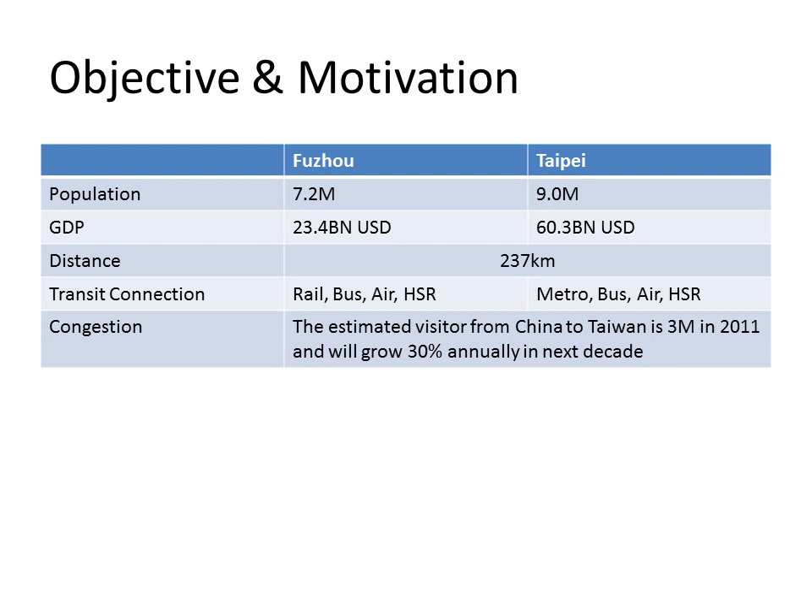For congestion, we are estimating that visitors from China to Taiwan will increase by 30% annually, starting from 2011 with a number of 3 million passengers, and it is going up 30% in the next decade.

First of all, we need to select our route. From the two locations, Fuzhou to Taipei, a total distance of 237 kilometers, we are going to have 3 stations for the total route.

The first station will be Fuzhou at the city side, the second one will be at the island called Pingtan, and the final one will be reaching Taoyuan city, in the Taipei center.

Looking in more depth, from the Fuzhou area to Pingtan Island is a distance of about 75 kilometers. We chose this route because we noticed there is a new development area happening in Pingtan Island.

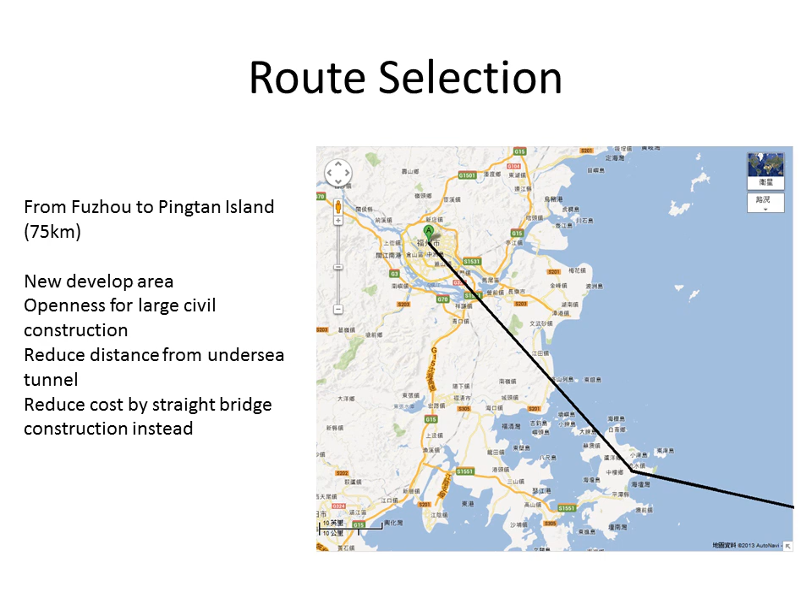That is an area of openness which can consider large civil construction being built. It also reduces the distance needed for an undersea tunnel, which reduces cost because using bridges is cheaper than using an undersea tunnel.

Once we get past Pingtan Island, we need to head towards Taoyuan city in Taipei, which consists of 164 kilometers.

This is a closer route we chose because we are starting here and can get from the coastline to Taoyuan city in Taipei directly.

Taoyuan city is 30 minutes away from the Taipei city center, which has mature public transportation. It is being developed for a further interchange railway if necessary, and it also avoids environmental impact issues by using an undersea tunnel.

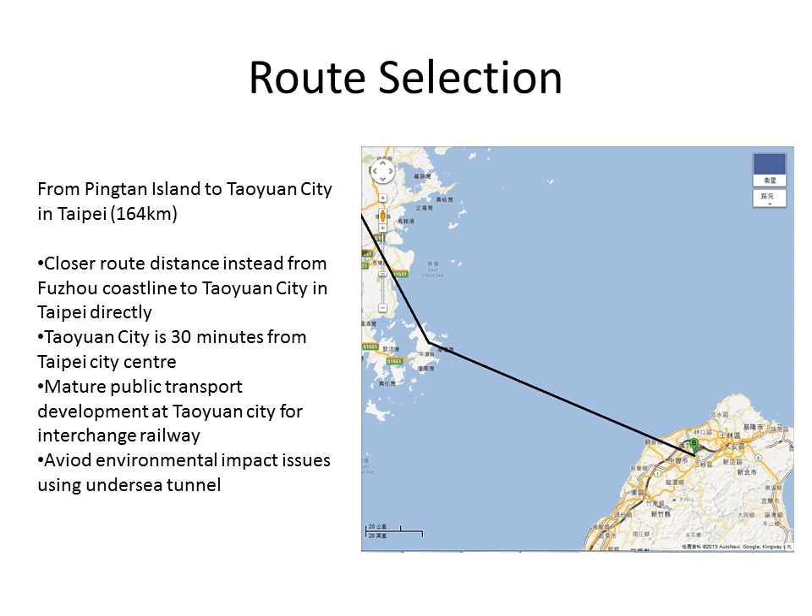For the next stage, we need to select the stations. In the Fuzhou area, we are looking at the Fuzhou South Railway Station, which is in the city center.

Finally, when we get to Taoyuan city, since there is already a high-speed rail station built, we reckon that with further improvement in construction, we can link up to the station as the final destination.

This is a table summing up our station selection. As we can see, the estimated traffic demand for existing transportation from Fuzhou to Taipei will be similar, using rail, air, buses, and high-speed rail.

For Pingtan Island, on the other hand, they are mainly using buses as the most common transportation. Next, we look at the population served.

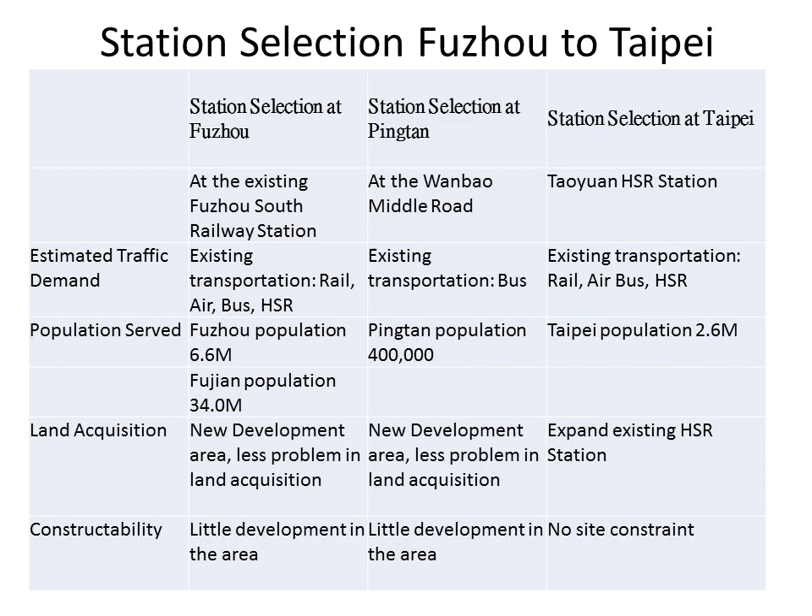Okay, for the second part we'll be looking at the environmental impact. Looking at Fuzhou, it is not situated in an environmentally sensitive area, and Pingtan Island is also not situated in an environmentally sensitive area. Whereas on the other hand, the Taipei area also has no major impact.

And then looking more deeply in terms of new and improved developments: for Fuzhou, it will be a new development area, allowing more new developments because it's adding construction. In Pingtan Island, there will also be new development as they should do. And for Taipei, there is not much existing high-speed rail station, and that's why we're going to improve it.

For accessibility, in Fuzhou the location is right next to the existing railway station and is served by the highway as well, so it's really easy to get to. In Pingtan Island, the most common transportation is the bus network, and this is where the station will be built next to.

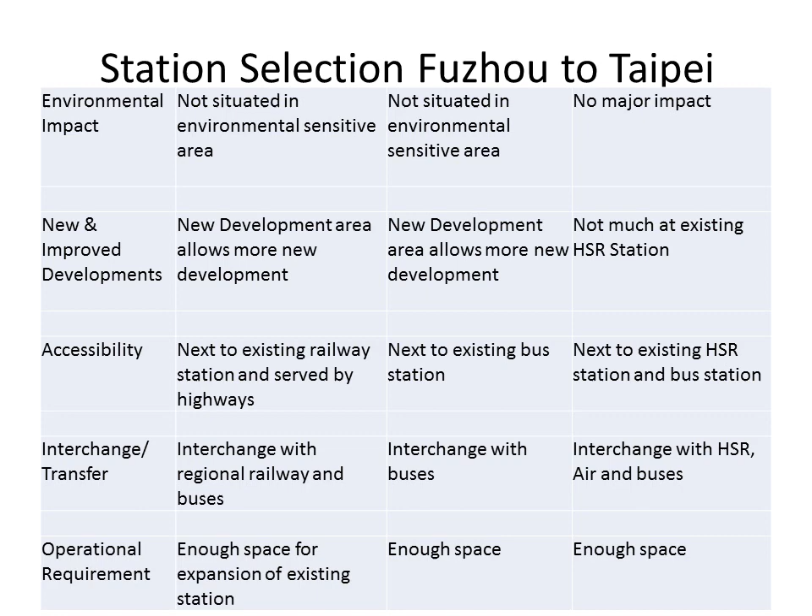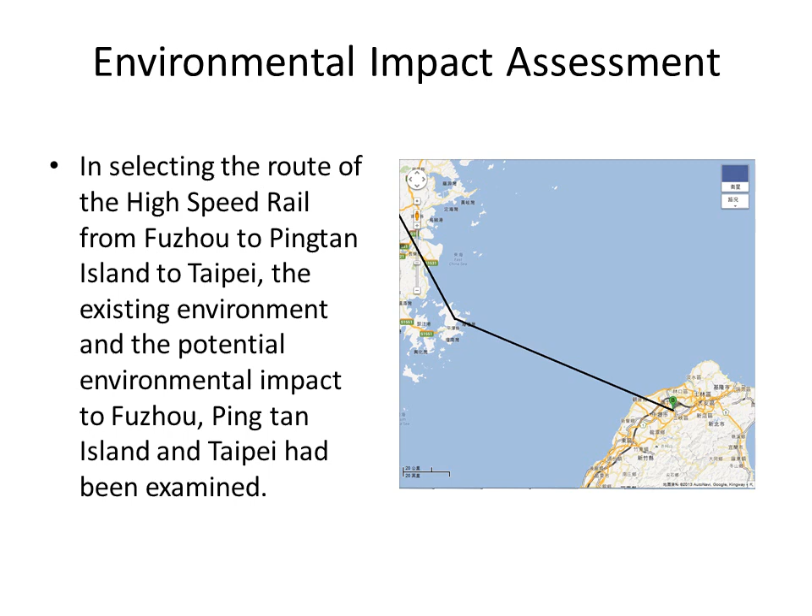Regarding the environmental impact assessment, in selecting the route of the high-speed rail from Fuzhou to Pingtan Island and to Taipei, the existing environment and the potential impact to the environment in Fuzhou, Pingtan Island, and Taipei have been examined.

Fuzhou is a typical river basin area at the mouth of the Min River. Over half of the area of Fuzhou is forest. Therefore, in our selection of the high-speed rail route within Fuzhou, we have avoided most of the forest area and the river to protect the existing ecology.

The natural habitats in the Fuzhou area along our route have also been identified, and they will not be disturbed as far as possible. Therefore, the route of the high-speed rail will have little environmental impact. The location of the Fuzhou high-speed rail station is within the city built-up area, and therefore there will be very little environmental concern.

On Pingtan Island, the geography is mainly natural forest area. Similarly, environmental studies have been carried out on the island, and the same strategy as Fuzhou was applied in the selection of the high-speed rail route.

The route will be mostly on viaduct to avoid large-scale disturbance to the forest area. The station on Pingtan Island will be close to the existing city built-up area. Hence, the environmental impact will also be minimal.

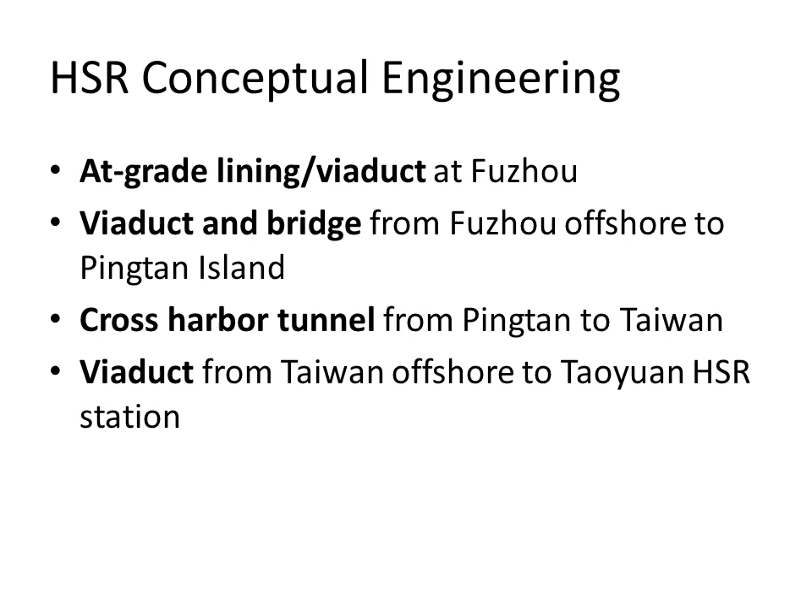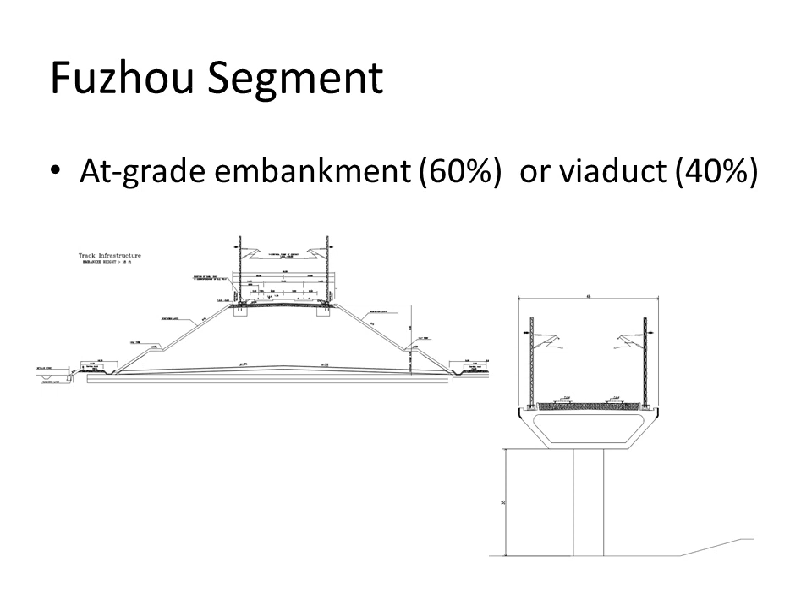And we propose the cable bridge because it is more cost efficient compared to the suspension bridge and other types of bridges, and it will cost less in comparison with a tunnel.

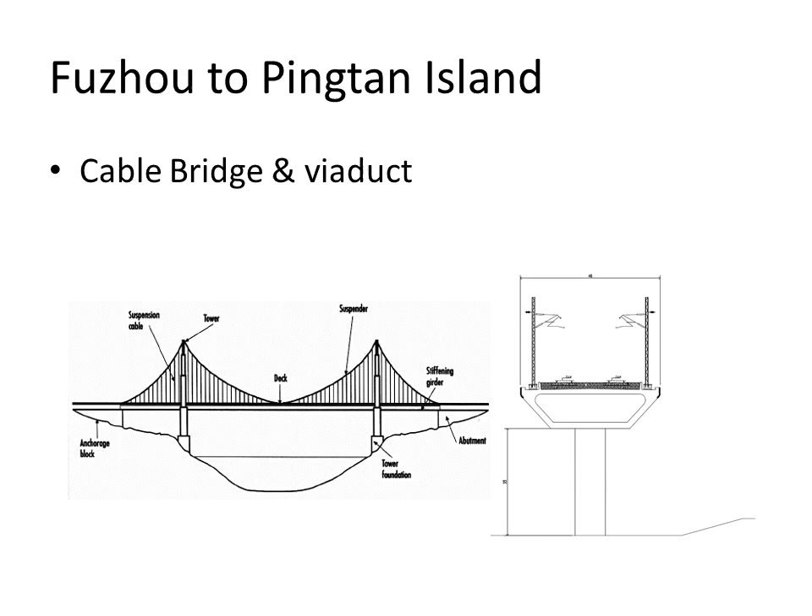There will be 3 tubes and the connection components to the tubes.

A is the main tunnel, in which the high-speed rail track will be built. B is a service tunnel for ventilation purposes, and C is the relief duct in case of a fire or some emergency event, so people can be evacuated to the C area. D is a connection ventilation facility to connect the two tunnels.

This design is very similar to the Channel Tunnel linking UK and France. We propose the additional service tunnel in the middle because for a tunnel more than 100 kilometers long, a service tunnel is a must for ventilation. In addition, when we construct the tunnel, there will be two TBM machines on both sides driving simultaneously to save time and advance the construction program.

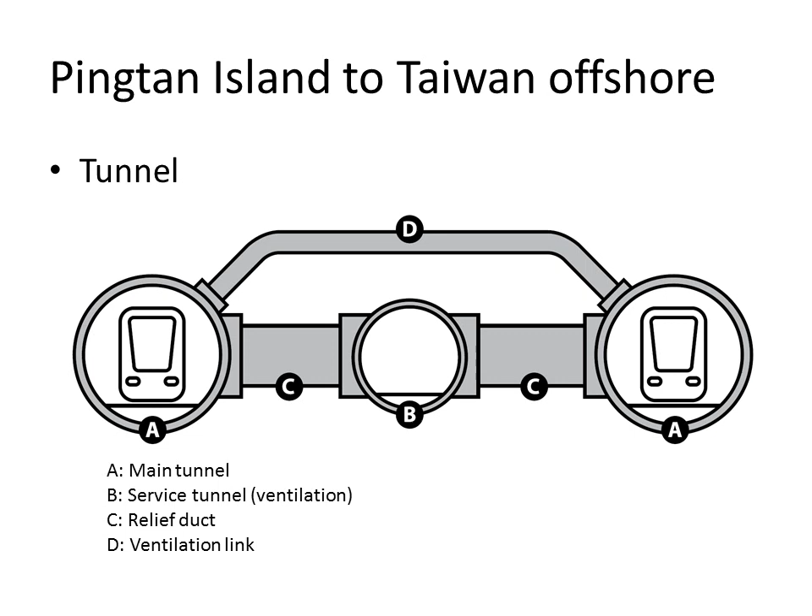From Taiwan offshore to Taoyuan high-speed rail station, we mainly propose a viaduct to protect the environment and save on land acquisition issues. In Taiwan, land acquisition costs are higher, and problems arising from local villages are more severe compared to the Fuzhou area. If we build a viaduct, this can advance the program and save money.

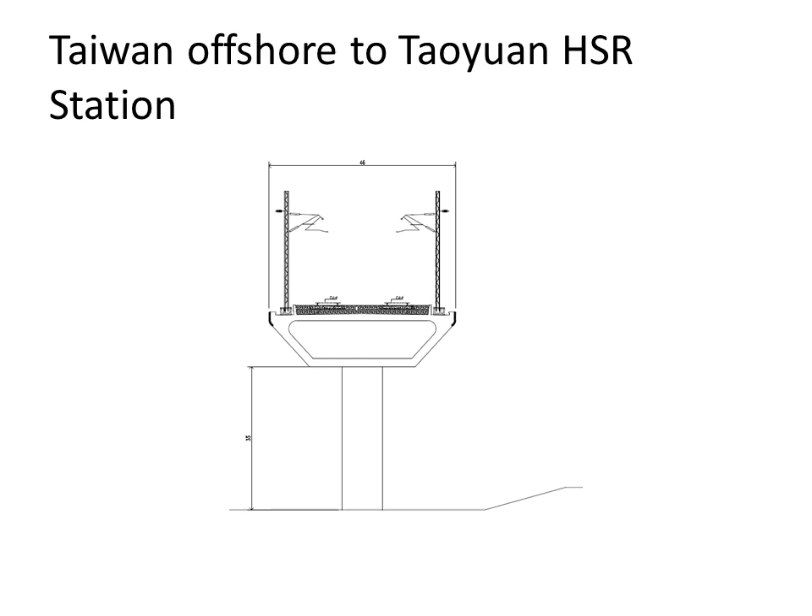The horizontal alignment is okay because there is not a big change in direction when the high-speed railway goes from Pingtan Island to Taiwan. For the vertical alignment, there will be a major change at Pingtan Island, from the bridge to the tunnel. Based on our estimation, there will be enough space on Pingtan Island to construct such a vertical alignment to meet safety requirements.

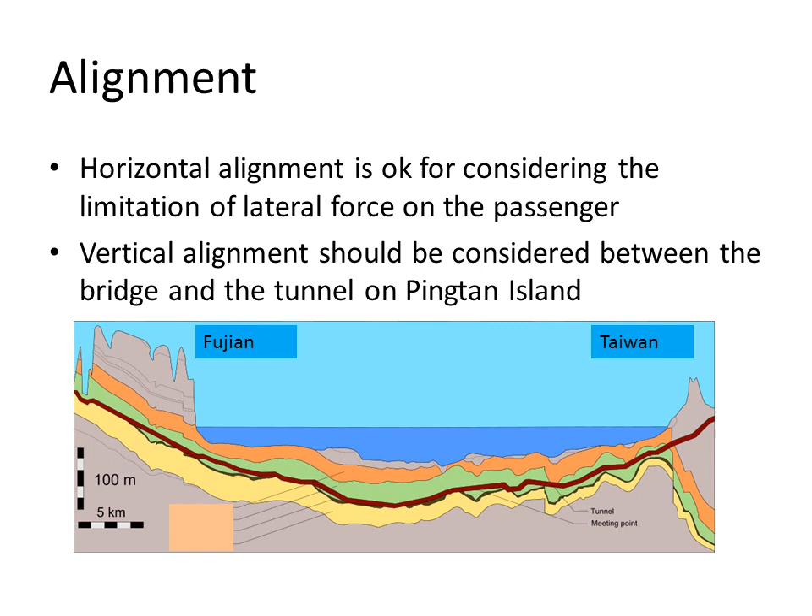I will summarize the key technical engineering challenges in the conceptual design. The first is the distance, the length of tunnel to be constructed. The shortest distance from Pingtan Island to Taiwan is over 100 kilometers, while the longest undersea tunnel ever built in the world is only 38 kilometers, the Channel Tunnel.

So safety is a great concern. For example, in case of a fire, there would be a big problem for evacuation of high-speed railway passengers. Thus we propose an artificial island in the Taiwan Channel to reduce the tunnel length. As well as reducing tunnel length, it can also reduce the duration of the program, because if we build an artificial island, there will be four TBM machines which can be operated simultaneously.

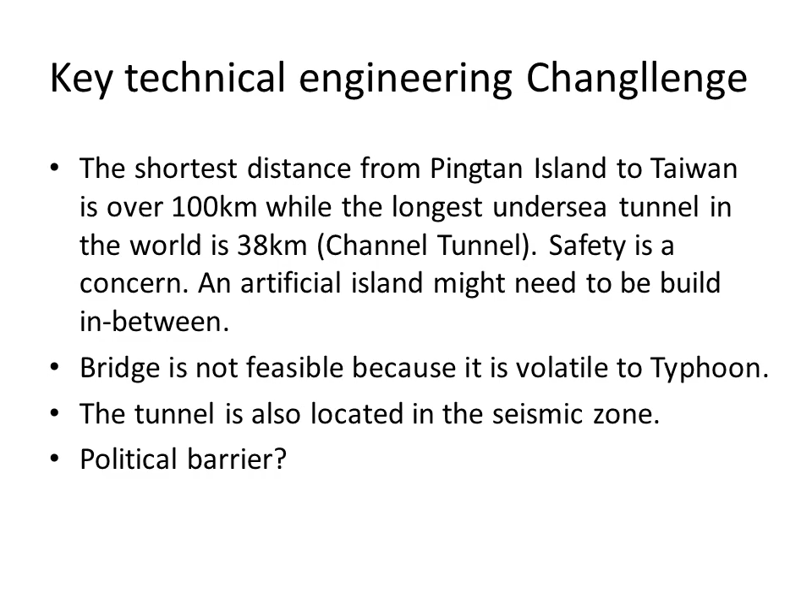If we build a tunnel from Pingtan Island to Taiwan Island, there will be a big concern for the safety of the tunnel under earthquakes, especially for the entrance from Taiwan, which has previously had some very severe earthquakes. So if the technical issues can be solved, I think the high-speed railway will be a good stimulator to the economy between China and Taiwan.

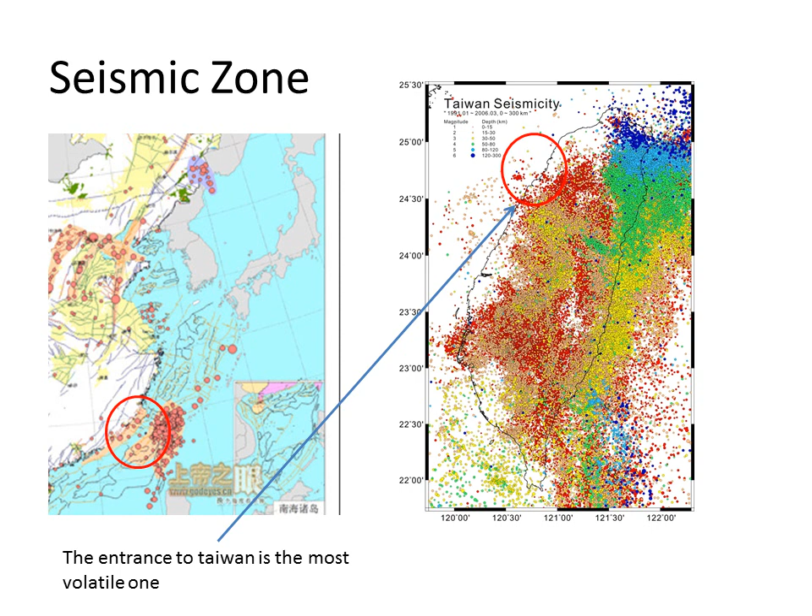Now the cost: the overall estimated cost for building this Fuzhou to Taipei HSR is estimated at $19 billion. It consists mainly of building up the track, which is at grade, on viaducts, on bridges, and inside the tunnel.

There are three stations: one in Fuzhou, one on Pingtan Island, and the terminal at Taoyuan City. Besides the track work and building the stations, there are associated costs for site work, getting the right of way, and environmental and landscape measures. Also, the train itself will cost quite a lot.

Upon the direct cost, we estimated there will be fees for design and construction management, and we have allowed 35% for contingency to cover any problems not foreseen at the moment.